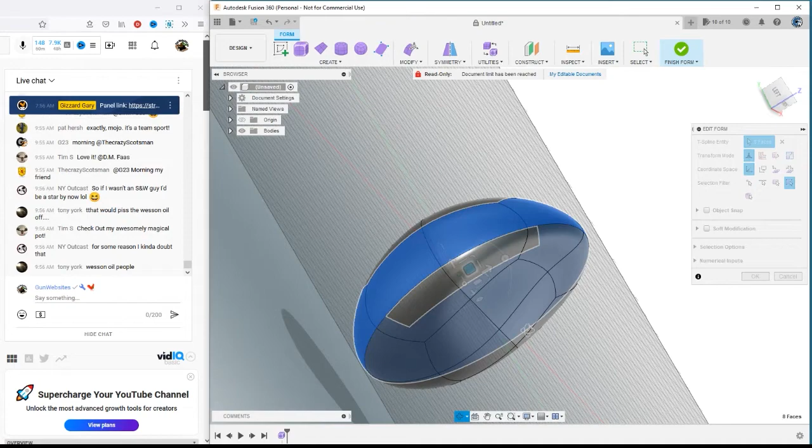So we made a Mr. K's during the Gizzard Gary early bird chat. He goes live every Sunday over on YouTube and lets people join in to have a live conversation. While we were in that chat, you'll see some of the text chat scrolling there over on the left. I just shared my screen.

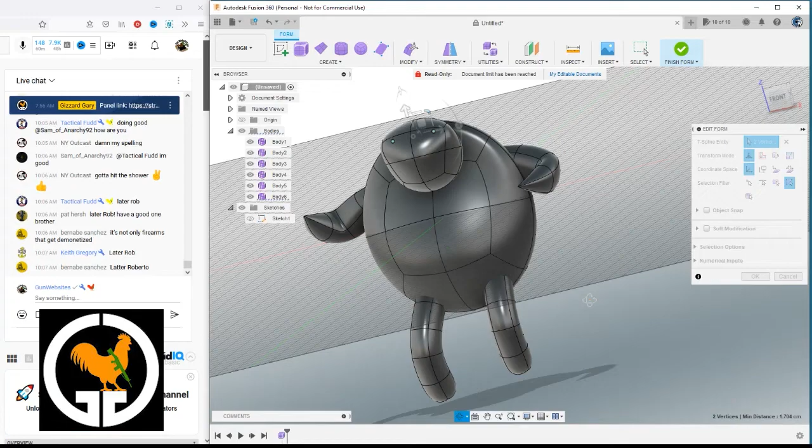I used that multi-hour chat as an opportunity to get in and play with the software and learn how the tools work and what works and what doesn't.

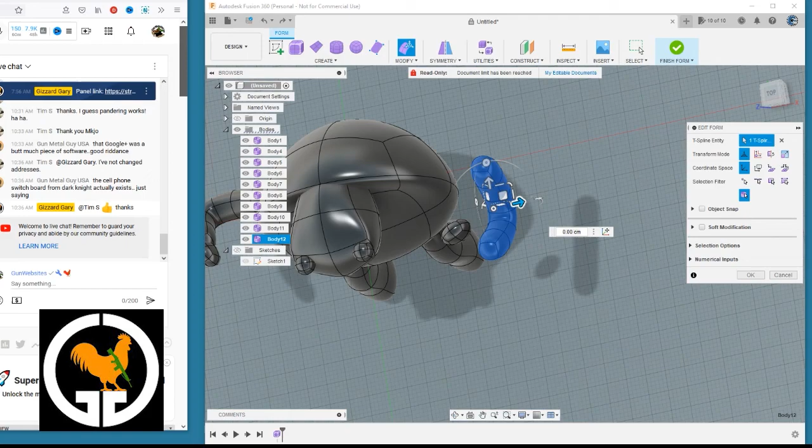In this case, I attempted to make a Mr. K's doll. So I went in and took a ball and squished it around, then added some tubes and spaghetti arms and squished those around and bent them and put little balls on them for hands. Added some legs, kind of played around trying to get some eyes and a head on there.

And then eventually figured Mr. K's would be pretty pissed if we didn't give him some pizza and a chocolate bar.

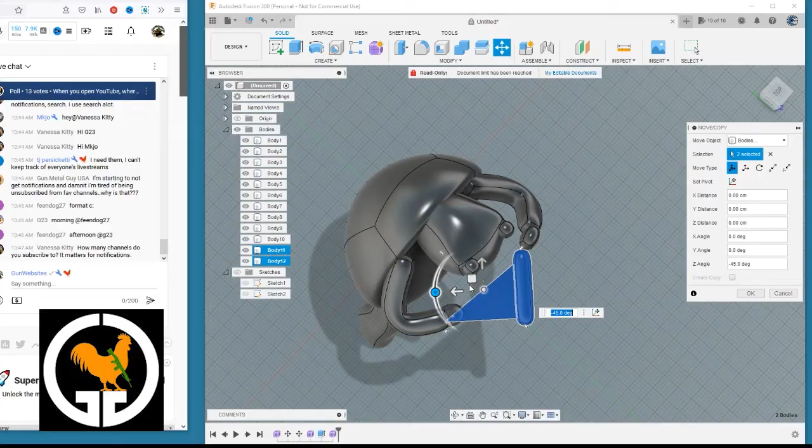So again, learning some techniques and the application of those techniques to the 3D model, which could be used for an animation, it could be used for a puppet or something like that, I suppose.

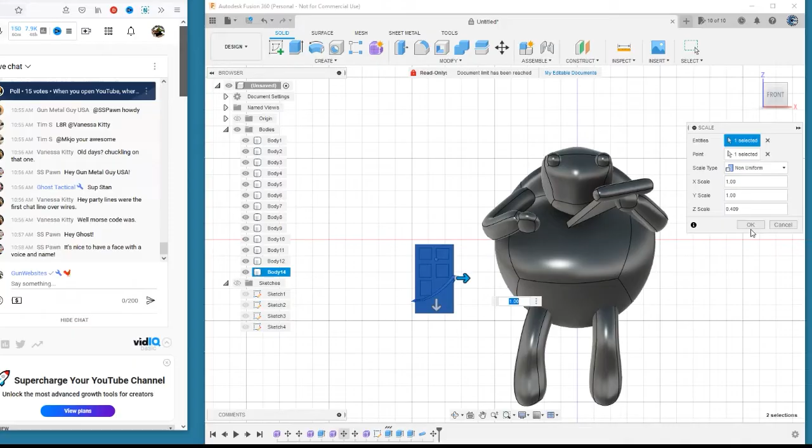In this software, though, it's designed to be sent to a machine. So in this case, we're sending it through a 3D printer, but it potentially could be sent to other types of machines. So we're taking the 3D elements, the parts, and we're creating them, manipulating them, modeling them, and connecting them together, associating them together, putting them together in three-dimensional space.

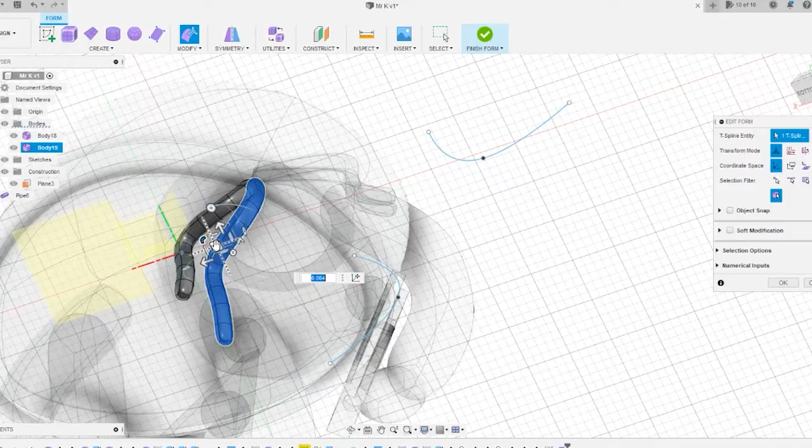So it's a lot different than the creation of just two-dimensional stuff, although two-dimensional stuff is another pretty complicated pile of things to keep track of.

So when we were all done, you have to stop somewhere. We put a Gun Channels logo underneath him so he would stand up.

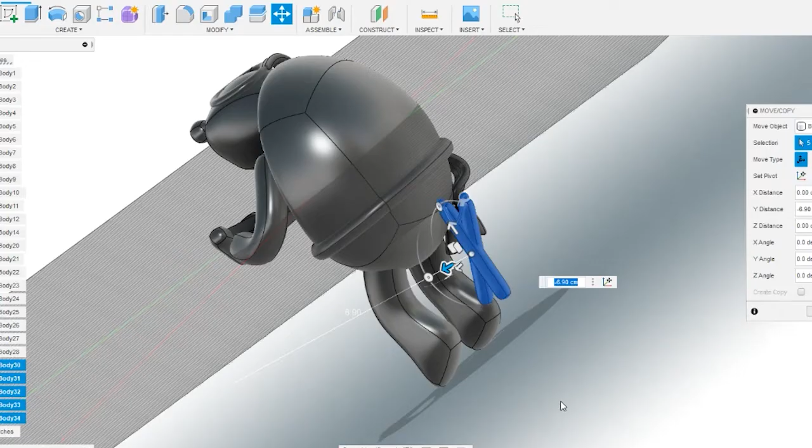Brought him over to the Slicer software, and that's the software that you use to reconstruct the file so that it heads over to the printer. So once it was in the format or the file type that it needs for the printer to understand it and to start printing...

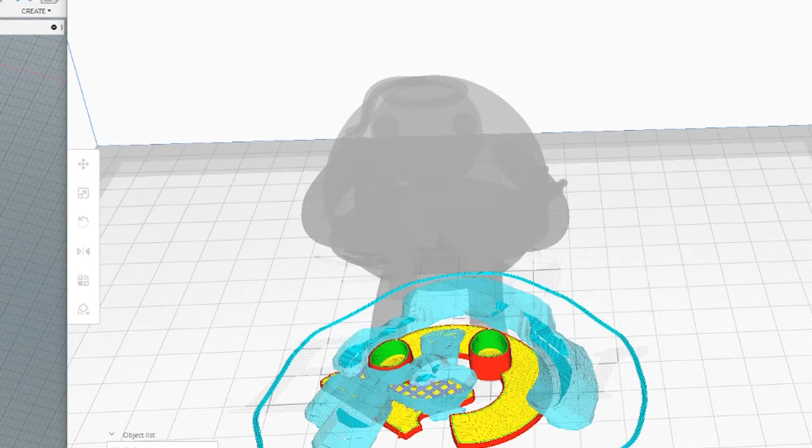We made a small Mr. K's that's about an inch or so tall, 2 inches tall, and that one took about 2 hours to print. And then we're printing some larger ones that are probably 4 inches tall that would take 4 hours or more to print.

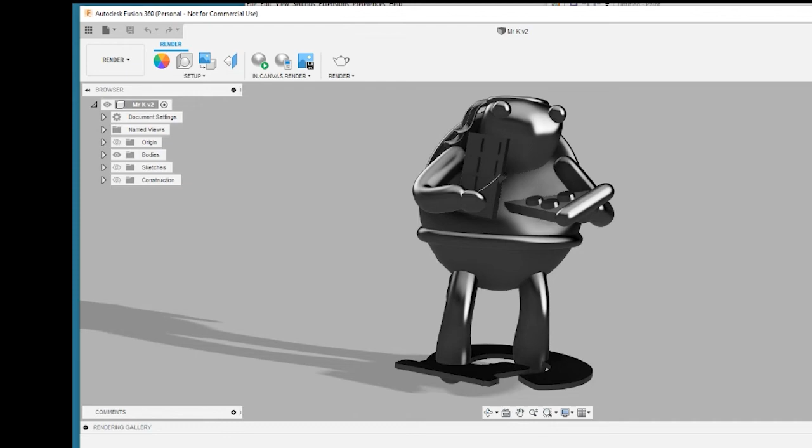So we went in and used the software that you use to create the projects and rendered them. That's where you go in and apply colors and textures and different applications to the surfaces to give them visual appeal and make them more easy to understand and to give you some idea of what a finished model might look like.

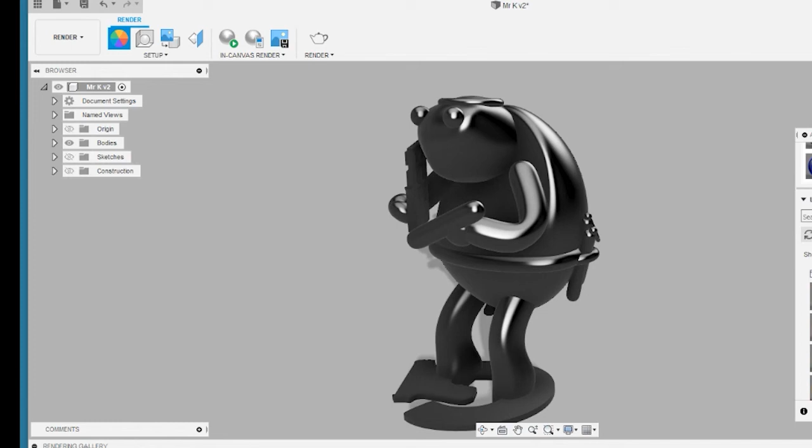I would think in this software, again, it's designed to send the file to machines. So in this case, the rendering is probably just for a visual model of what the end product's going to look like. I'm not sure yet if I can send this to an animation software, or if I could save it in another format that could be used by animation software. But I suspect the creation of these files is going to be somewhat similar.

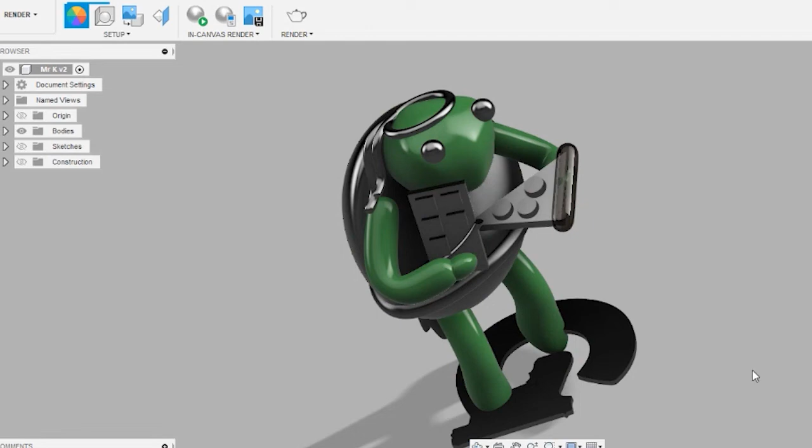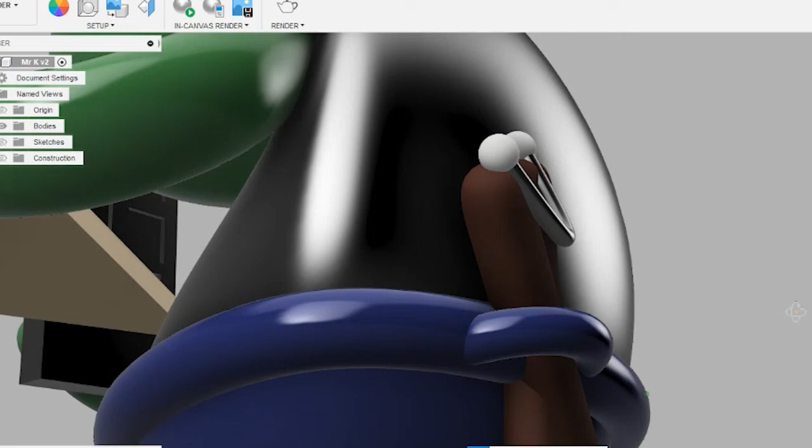You're applying skins so that the animation software will know what the figure is supposed to look like. In this case, I learned I didn't apply enough segments to his overall body, so I couldn't really get the shell colored the way I'd like in this particular rendering.

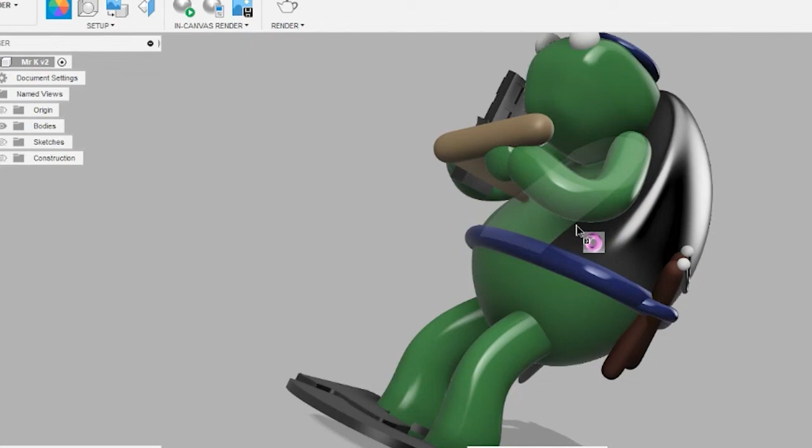But I think I was able to apply the colors and surfaces to pretty much everything else. The candy bar I probably could have spent a little more time on. But what we end up with is a lot easier to understand than the all-yellow versions, or the all dark color versions, which can be pretty muddy and difficult to see the details.

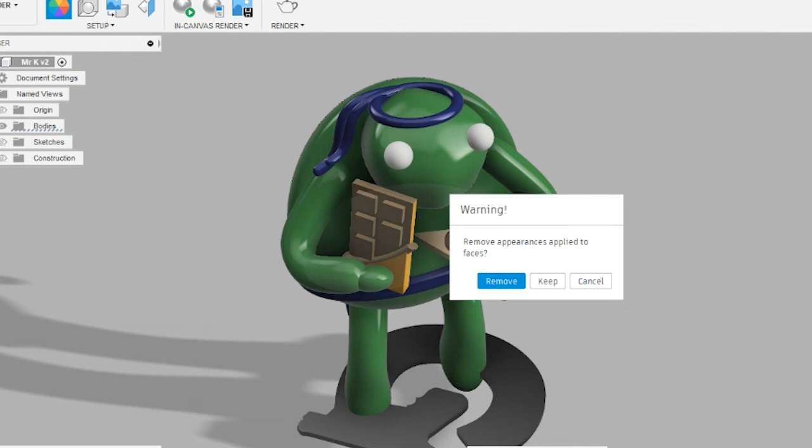So in this case, I changed the lighting a little bit, and that gives it a different look. And then at some point, I changed all the green portions to be rendered in jade, so they look like a jade mineral or rock.

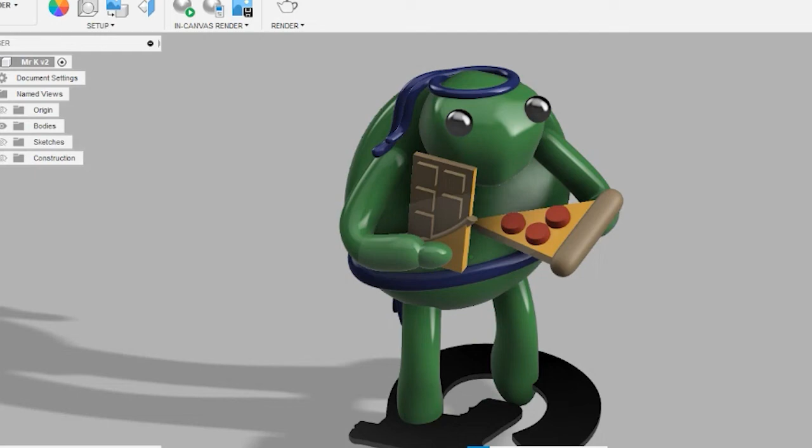Back in the slicer software, one of the experiments here, one of the learning parts, is seeing what kind of shapes can be printed with and without support, what support I need on some of these overhanging areas that come out with nothing vertical underneath to rest on. You can see how the pizza has a lot of area underneath where it needs support, and there is none.

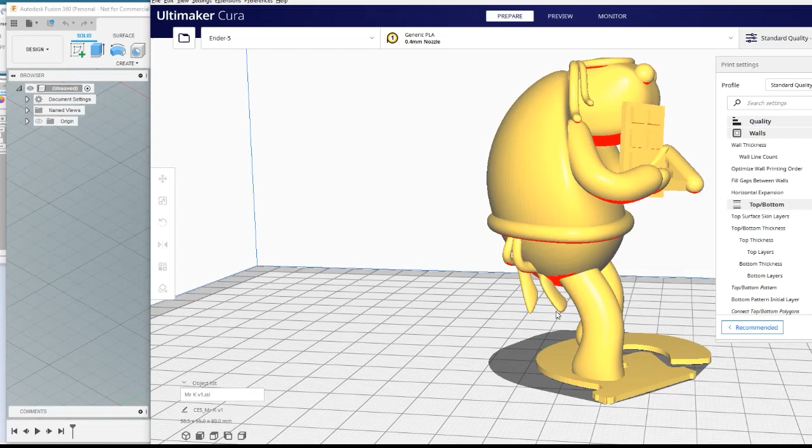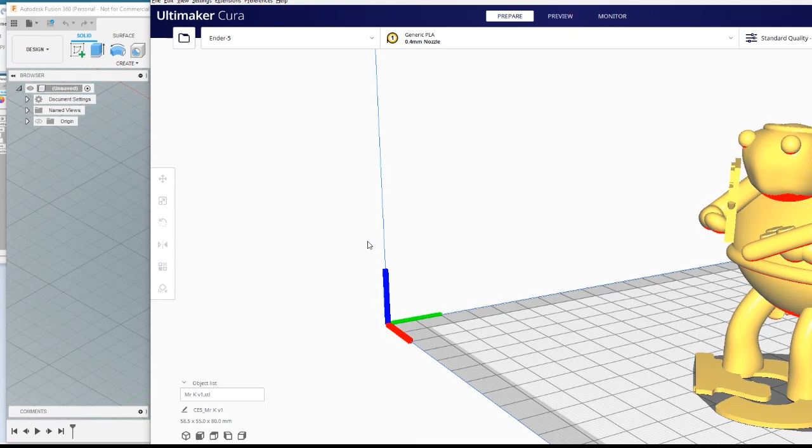That's a factor when 3D printing: how to set the calculations so you get enough support for the end product to look good without sacrificing time and material. Material's not a big deal, but the more material you add to the part, the more time it takes. So usually we try to put down as little plastic as possible so it takes the least amount of time to create the thing.

In this case, some things like the candy bar and the pizza are very thin, so it'll be curious to see how they come out. They came out okay on the little version. I printed one little version as I'm editing this, but I'm still waiting for the large ones to print successfully.

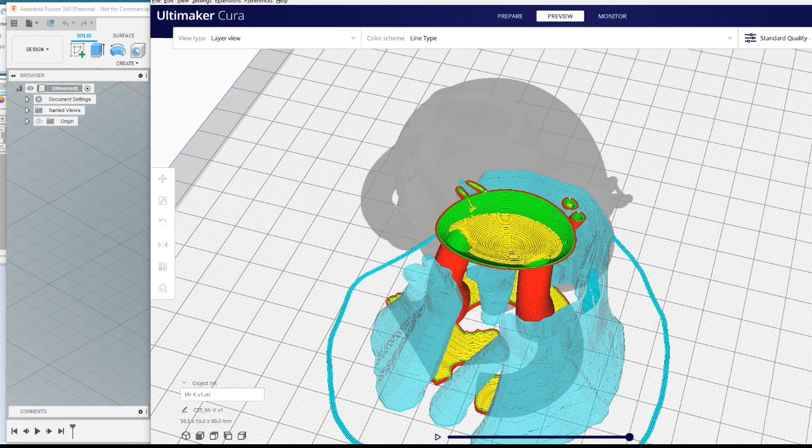I've had a couple of failures so far. So I'll probably go back, and if I was ever going to make this as a real model, I'd want to support his ankles with some infill, and potentially add more inside support to other parts of him.

That's a long video, so with this I'll have to end it.